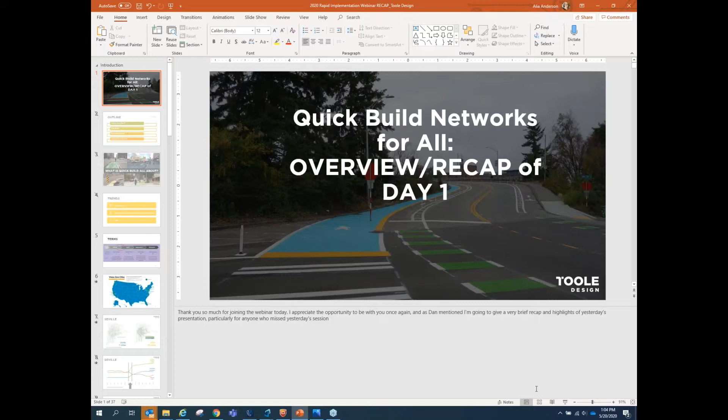And as Dan mentioned, I'm going to give a very brief recap and a few highlights from yesterday's presentation in case you missed them, particularly for anyone who missed the session yesterday. But my comments this morning will be pretty quick. So I just wanted to start with terminology and definitions.

So as we discussed yesterday, quick build and rapid implementation are terms that we use interchangeably to mean basically a project that uses semi-permanent materials to implement a transportation project for roughly a 1 to 5 year timeline, during which you would collect data about safety and use, and then ideally install a permanent design that responds to what you learned.

So it's important to note that this is distinct from a pop-up or demonstration project. Things like tactical urbanism or better block projects, those are considered pop-ups or demonstration projects, and those are typically installed with more temporary materials. This is where we're thinking, chalk paint and straw bales. These are often homemade materials, easily installed and removed. That's not really our focus for today. There are a lot of resources out there about pop-up or demonstration projects. Please follow up with me later, and I'd be happy to point you to some of those.

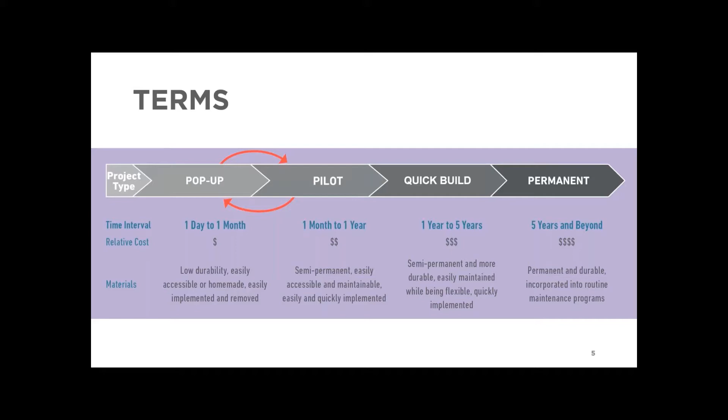And similarly, although our current situation with the pandemic has led to higher than ever demand for safer and wider spaces to walk and bike, the projects we're discussing and the case studies you're going to hear today aren't related to a COVID response in the city, and that's not the focus of today's webinar. Many of the messages that you're going to hear today may be relevant to your COVID open streets planning or similar, but we're not focusing specifically on that. If that is something that you're interested in, please, again, feel free to follow up with me, and I'd love to share some resources specific to that.

And I think this is a big part of the motivation behind quick build, because as cities and counties look to eliminate severe injuries and fatalities from traffic, they're recognizing that doing so in an effective way would take much longer than they have time for, given their Vision Zero commitments, and really starting to view these as life-saving infrastructure design solutions that there just simply isn't time to wait. And so if we can do them effectively and safely, but quickly, why wouldn't we?

I walked through several examples, and I've swapped in some different examples for those of you who were here yesterday. I wanted to share as many pictures as possible. So I just wanted to share some examples of what quick build projects often look like. So here's one on the left from Minneapolis. We're going to hear more about projects like this with one of our case studies today. On the right, a freeway overpass in Seattle, Washington.

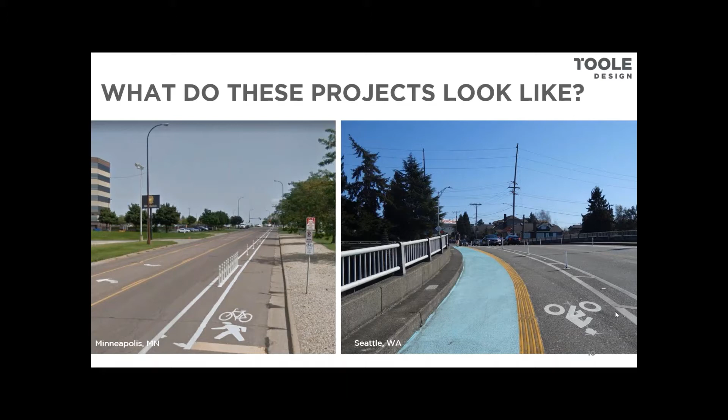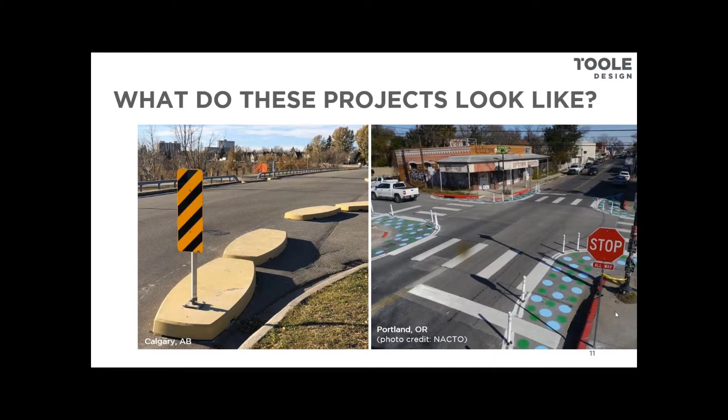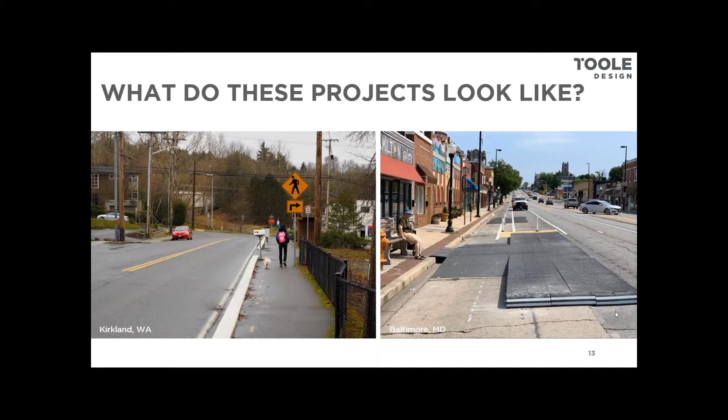Lots of quick build projects are bike lanes, or what's called a pedestrian lane or adaptive sidewalk, as you see in these pictures. Lots of quick build projects are intersection improvements that shorten crossing distance or slow turning vehicle speeds, like the ones that you're seeing here from Calgary or from Portland, Oregon. And quick build projects are often used in both urban locations, like on the right in Baltimore, Maryland, or in more suburban and rural locations, like this adaptive sidewalk in Kirkland, Washington. So we do see them in all sorts of contexts, and the materials change widely. But as you can see in all of these examples, the materials are fairly quick to install and the types of things that you would improve and upgrade over time.

Some of the strengths of quick build that we talked about yesterday, I'm going to recap very quickly. These are drawn from Toole Design Group's work on quick build projects across the country, and also just research that's been done about this subject. So some key takeaways. First of all, they are strategic because they avoid the issue of the perfect being the enemy of the good. And that is mostly focused on design.

Oftentimes we spend a lot of time perfecting our 100% design plans because the installation of the project is going to be permanent and very expensive. Whereas if you are comfortable getting a project to 90% design and installing it there and then adapting and improving it over time, because the installation is not as expensive to install or change, it can be a lot more beneficial and get the project done quickly.

Everybody has experienced, I'm sure, in their own community, the impact that fear of change has on transportation planning and community development projects. Quick build projects help solve that because they give people something to experience and start using, as opposed to looking at photo renderings and talking about it in the abstract for years. So it really can help manage backlash and negative reactions that are mostly tied to simply the fear of change.

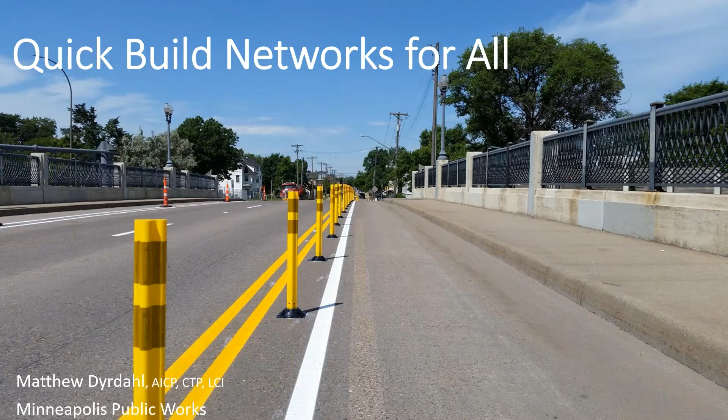Thanks, Dan, and thanks, Alia, for the intro. I'm Matthew Dyrdahl, Bike Ped Coordinator in Minneapolis. I'm really excited to talk with you today about our quick build history in Minneapolis. In preparation for this webinar, it hit me that we have maybe more of a robust program for quick build than I had thought before I started preparing. I'm excited to share that story and how it ties into all the other work we're doing, from protected bikeways to pedestrian crossing improvements to our Vision Zero action plan work. And briefly at the end, how this preparation for quick build has helped us at least partially respond to the COVID-19 pandemic.

The other way to frame the story of quick build in Minneapolis dates back to when I started for the city in 2015. At the time, there was a significant amount of community requests every year, probably thousands, through our 311 and others. Our pedestrian and bicycle advocates and advisors were really advocating for quick build in Minneapolis, and we didn't have a great way to respond quickly to a lot of these requests, because often they don't align with our capital program, so it's very challenging to figure out how to do it. So we started with Quick Build as a way to respond to some of these community requests.

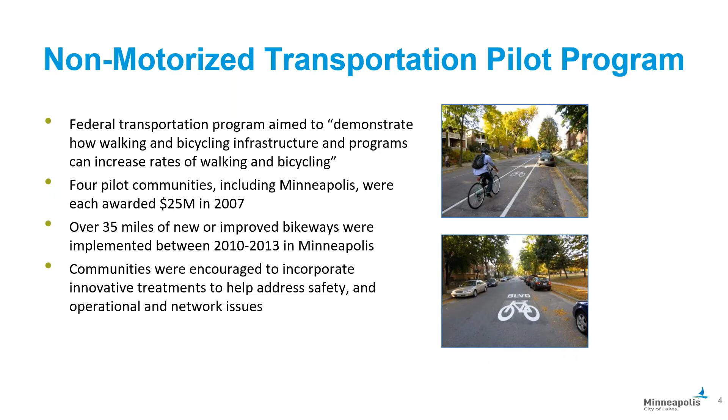...was help us fund and build bikeways in Minneapolis. That's the biggest impact it made. It was a $25 million grant that we received, and we did a robust evaluation of it.

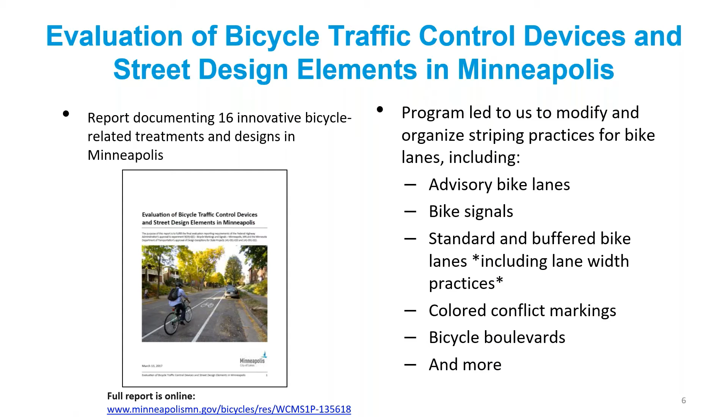Sorry, welcome back. I had just gotten done, or was in the middle of talking about the federal non-motorized transportation pilot program. I'm going to move on to the vision of our protected bikeways in Minneapolis, and frame it around Quick Build as well, because that was our implementation approach.

In 2015, the city passed a protected bikeway plan that called for up to 48 miles of new protected bike lanes by 2020. The goal was 30, but we had 48 miles in the plan, and we definitely hit that 30-mile mark and are moving on to others now.

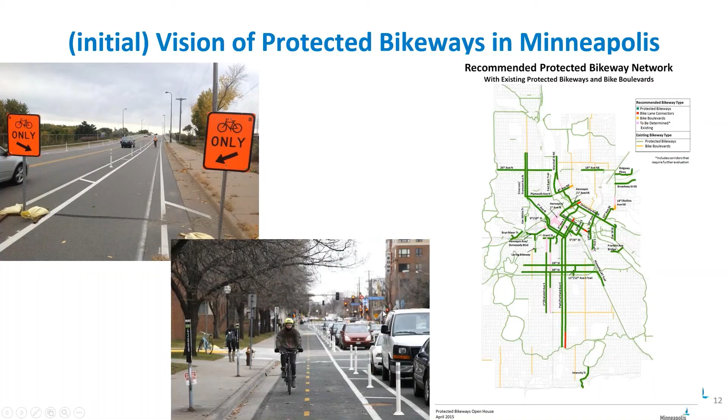The pictures show some early installations: reducing a 4-lane street to 2 lanes for traffic with wide buffers and bollards. In the middle and bottom pictures, we added a 2-way protected bike lane near the University of Minnesota, also with bollards.

Since then, we've transitioned to a different type of concrete barrier, still about 6 inches high and 2 feet wide, but we bought a machine that just pumps it out, kind of like those Play-Doh machines where you push it down from the top and it produces a really smooth concrete barrier. That's a positive part of our Quick Build program in terms of providing a more robust barrier.

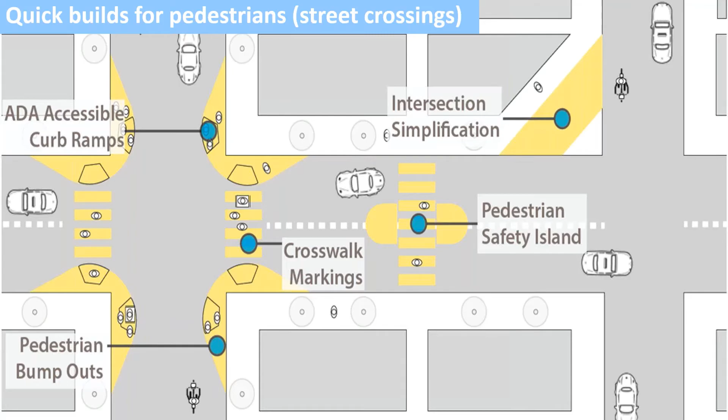We have a variety of neighborhoods in the city that have weird streets that zig and zag, and it just leaves a little extra space for people to cross. So one of the things we've been doing is going back and using quick build to tee them up, kind of get rid of some of that dead space. I'll show some examples of that.

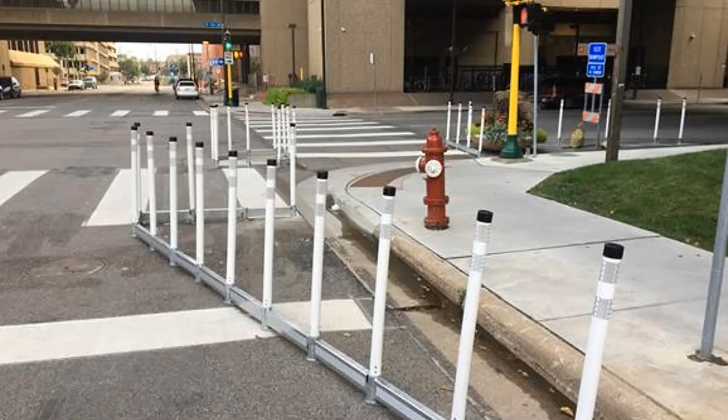This was just an opportunity to show people what it could look like, extending the curb or curb bump outs. We were also at the time considering revisions to our crosswalk marking policy, from transverse parallel lines to a zebra or continental.

We've also experimented with using rail. What you're looking at now is a 2017 installation, essentially using a solid rail that's drilled into the pavement. This is called design line as the quick build. And we did a fairly extensive evaluation of this as well.

The biggest thing I was worried about as a winter city is how well snowplows would handle this. There were really no issues with it. They were able to use the rail kind of like they do a curb, and the plow blade could essentially rub against it without damaging it or the plow.

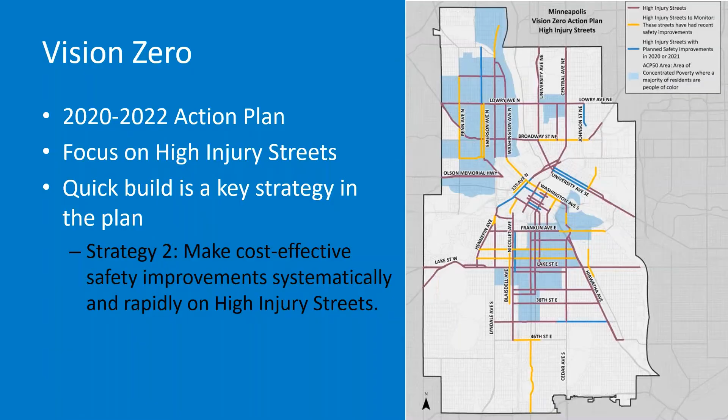And then finally, some of these quick build treatments have been popular, they've been successful. When we passed our Vision Zero action plan this past December, one of the biggest strategies was essentially a quick build. So in the first 3 years of our implementation of Vision Zero, we want to get to as many of our high injury streets as we can.

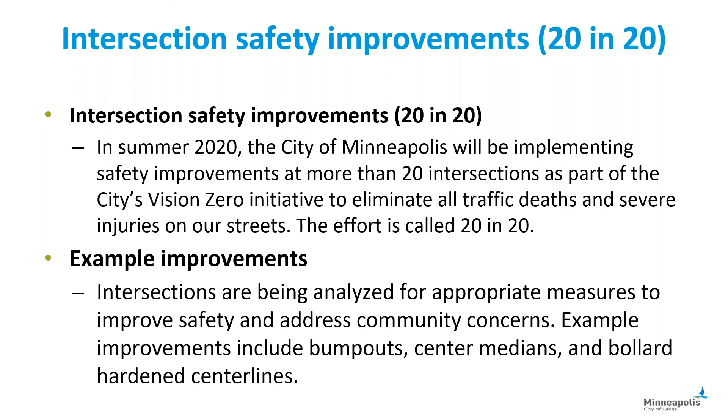In 2020, this year, we have an initiative we're calling 20 in 20, where we're going to install 20 quick build pedestrian and street safety projects. Again targeting bump outs, center medians, and also experimenting for the first time with bollard hardened center lines. That'll be really interesting to see how that works.

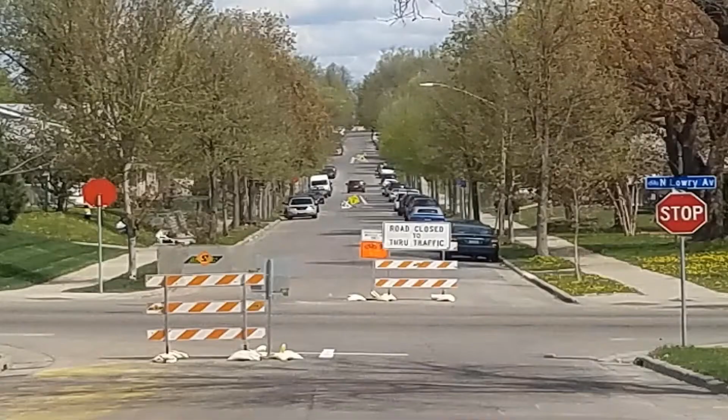And then again, I'll quickly go through here in the interest of time, but we've taken some of the lessons of quick build and applied it fairly rapidly in response, to open up some more space for people walking and biking for social distancing. You can see on the right the context for our city and where these healthy, stay healthy street loops are. And our park board has also done a lot of work around their parkway system around the lakes and the Mississippi River. I'll just show a couple pictures of that.

And then I'll just end with our lessons and suggestions. I know there's probably a wide variety of cities, agencies, and interests on this call. So lessons for communities that haven't worked much with quick build: I would say try it out, call it a pilot, temporary, a test, whatever you want to call it.

I think this helps put people's minds at ease. Permanence can sometimes make people a little more nervous about it. Be prepared for issues and have that be part of it, so assure people that you'll evaluate, monitor, adjust, and actually follow through on that. So if a neighborhood business has issues with a quick build, you may want to work with them to change it. And interestingly, being prepared for success is also a suggestion.

We've dealt with that a decent amount. Early on we planned to take out our installation after a couple months, but the evaluation showed it was really successful, and then there was just a lot of pressure to keep it in and make it permanent. That can be a year or two process, so just be prepared for that or think through how you'd respond.

Find low-hanging fruit. Parking spaces near intersections are a great place to start for pedestrian crossing improvements, because you can just put the bollards in—people shouldn't be parking very close to the intersection anyway. Also, if you have wider streets, you can narrow up some travel lanes and install bike lanes with a little bit of a buffer and put in some bollards. I think that can build up support and show evidence that it works.

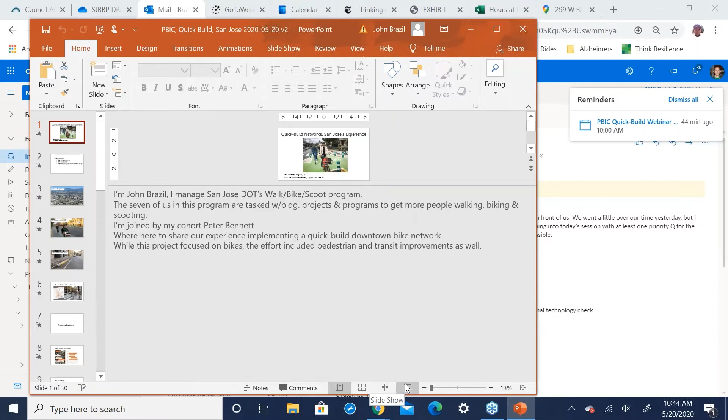Wonderful, well thanks everyone. Matthew, that was really great, fascinating to see your work—I was really inspired by it. Also thanks to Amar and Aaliyah for their great presentations. My name is John Brazil, and as Dan mentioned in the introduction, I manage San Jose's Walk, Bike, Scoot program. There are 7 of us in this program, and we're tasked with building projects and programs to get more people walking, biking, and scooting. I'm joined by my cohort, Peter Bennett. We're here to share our experiences implementing a quick build downtown bike network. While this project focused on bikes, the effort did include pedestrian and transit improvements as well—I think Peter may touch on that in his part of the presentation.

Okay, so here's what we're going to share with you. First, I'll start out with a snapshot of the city to give you context. And then to set the stage, I'll provide a bit of history on our previous efforts, and I'll note a few aha moments. I think they'll seem kind of obvious to you now, but back then they were somewhat of ahas. And then I'll hand it off to Peter, and he'll talk about our Downtown Better Bikeways quick build network.

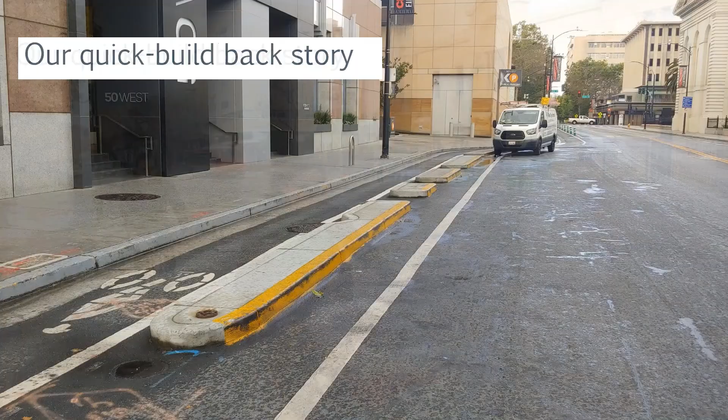So now jump forward to 2014 when city leaders were beginning to warm up to separated bike lanes and bike boulevards. But using traditional planning, design, and construction processes created all sorts of problems that you've heard us talk about in this presentation and yesterday. They took too long, they were too expensive, and they didn't allow nimble iterative modifications. Our first separated bike lane took 2 years, cost about $50,000, and was only about 50 feet long. You see it here in this picture. It was a raised curb protected separated bike lane. And by the way, this picture was taken during shelter in place. That's why it looks pretty dead in the picture, but usually it's pretty active.

So this is where the second aha comes in. We needed to use quick build strategies. And that's exactly what Peter did with our Downtown Better Bikeways project in 2018 and 2019. Before Peter talks about that project, let me mention how we're scaling up this quick build strategy. I and a consultant team at Toole Design have nearly completed a 2-year process to create our new city bike plan. So that plan includes a 600-mile network that will be all ages and abilities, so mainly separated bike lanes and bike boulevards, and it will also be quick build. So this will cut the implementation costs and schedule nearly in half. That's a huge benefit. So now let me introduce Peter to talk about our Better Bikeways quick build project.

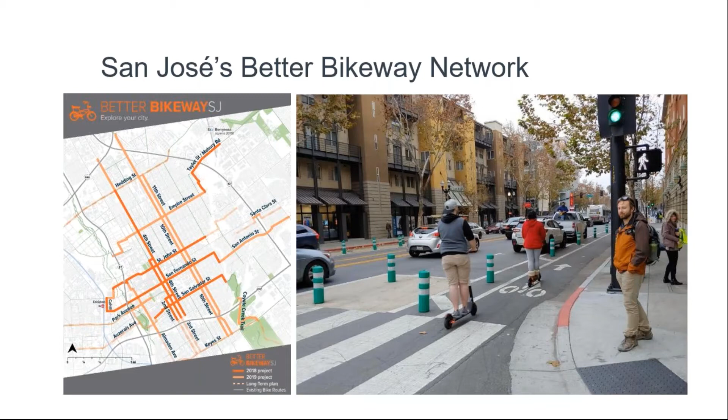The scooters actually arrived in that early 2018 time when we were just doing the planning and outreach for this project. Nothing had shown up on the ground. And many people joined our meetings and said, you know, let's talk about the scooters. Why are they on the sidewalks? And it was very good timing for us to say, well, we actually have some projects planned that could address this. And so the scooter riders helped actually form some support for this project. And as we started to get some ridership data, they also form some of the increase in ridership that we've had.

So first, I'll go through what our outreach engagement process was like. We used many different methods. We didn't just hold 2 public meetings and go to construction and dust off our hands. We knew that this was going to be different and this is going to be big. And the concept that we talked about for what we were trying to avoid was called the political valley. And that is the line graph on the bottom right.

You can see while your project is being planned and starting construction, not many people know about a project. It may have moderate support, and then as soon as you hit construction, you're going to dip into a valley. We saw that yesterday in the example from Calgary. But your challenge here is to make your way out of the valley as the project is finished construction and seeing a lot of use picking up. But we knew that we're not getting out of that valley just from sitting back and waiting. We needed to hold all kinds of different outreach throughout the process.

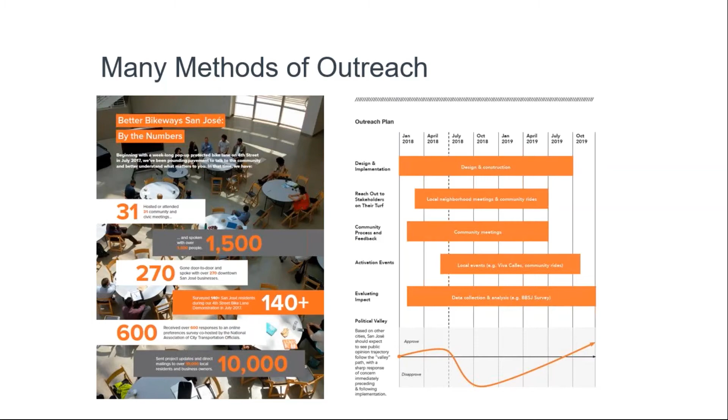So the orange bars above that represent that our meetings are going to continue for a year past when construction starts. And the numbers on the left show that instead of just a few meetings, we actually were going to organizations that were already meeting and doing 15 minutes on their agenda. We were doing more mailings, we were going door to door with businesses, and other things like that. So we saw this as kind of a mixed methods approach.

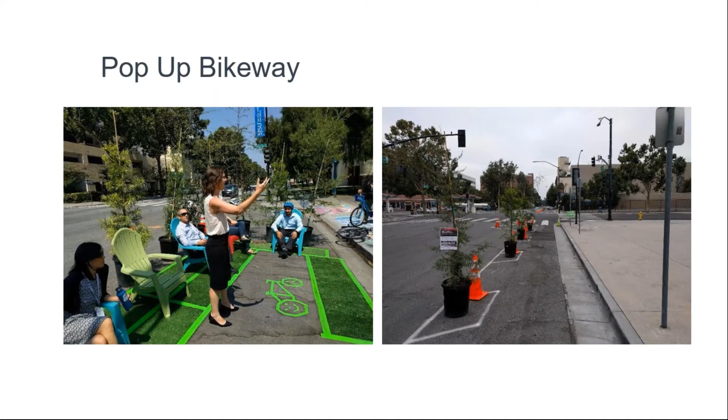Here's a few pictures of those methods. Actually, in that early planning phase, we did pop up the bike lane on one street for 1 week. And so this is not a quick build project, but showing what you're talking about using the pop-up methods helped us get to phase 2 of that spectrum from quick build to permanent.

We also knew we had a lot of stakeholders in the downtown that would make or break this project. And so some of these stakeholders involved some detailed design meetings instead of just the 15 minutes on their agenda. The picture on the right shows that we were in the fire truck with the fire department, seeing how they navigate our streets and how we can design for that.

And this was our political valley. We had the paint go down on one of the first streets on a Friday, and everybody parked in both lanes, the old parking and the new parking. And the news outlets were very quick to take some very enticing pictures of this. So we had articles come out. We had to adapt quickly, and we looked into if the bollards could go in soon afterwards, or what we could do. And it actually only lasted about a week in this condition of parking in both locations.

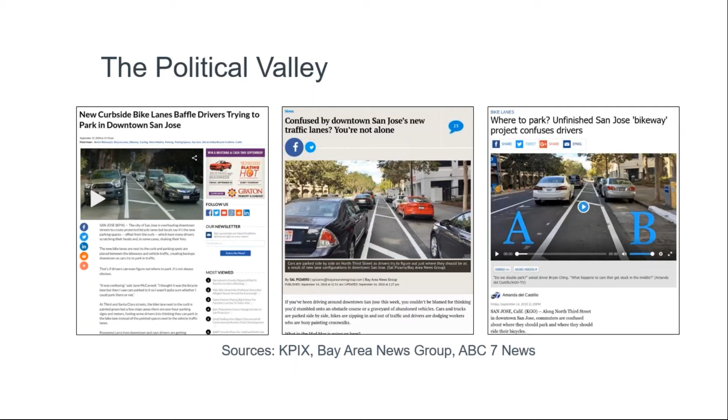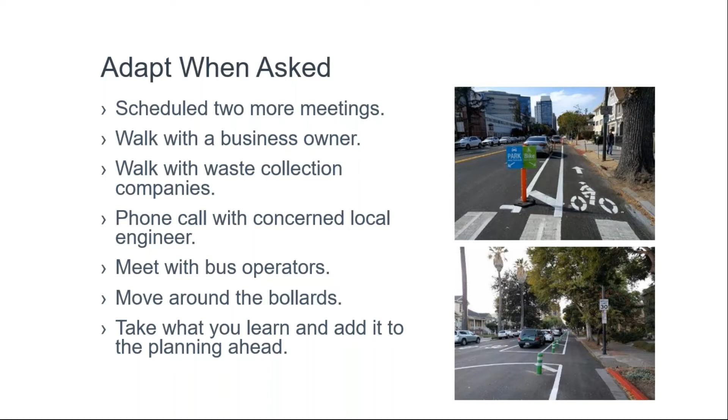But that doesn't mean the political valley lasted a week. We had other things we kept doing. And so here's some examples of things. When we had a concerned local engineer, we would go out and meet with him or have a phone call with him. The bus operators and the trash collection companies, we would adapt when asked for someone who's providing input. We want to talk to them, and whether they're happy or upset, we found that listening always resulted in maybe a design change that everyone could be satisfied with.

So now I'll get into the design and construction of this bikeway network. I find that these lessons might be a little bit in the weeds, detailed, but a lot of folks who are in this webinar might not see all the specific details, but will be able to take some of these to their projects.

The background is, as I mentioned, this is part of a pavement maintenance project. So something San Jose has been doing for years is when a street is repaved, we always see that as an opportunity to change the layout from one curb to the other curb. So there's going to be a new coat of asphalt on top of the street. What can we do just with paint alone that changes the lane arrangement, adds bike lanes, adds crosswalks, but nothing that is a physical construction? And so that's something that we've been doing for several years.

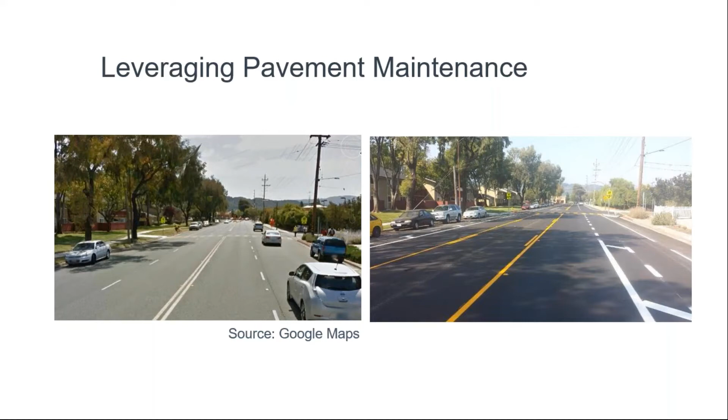And when the concept of an all ages and abilities bikeway network came up, we said, well, the one tool that we need to add into our toolbox is that we'll need some kind of vertical element. So quick build for us was essentially doing the pavement maintenance project with the paint on the ground, but also putting in a few plastic posts.

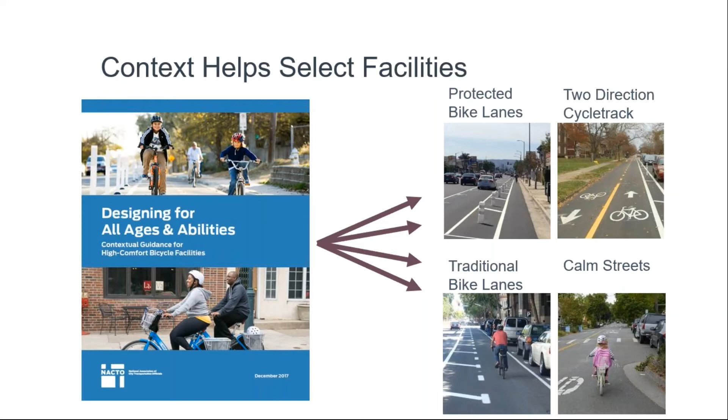We used the NACTO All Ages and Abilities Design Guide to determine what type of bike facility made the most sense on that grid-like map that I showed you earlier. And it wasn't always a separated protected bike lane. That was the case for places where we had higher traffic volumes or speeds, but in that NACTO guidance, you also sometimes are guided towards installing a basic bike lane or a bike boulevard type treatment.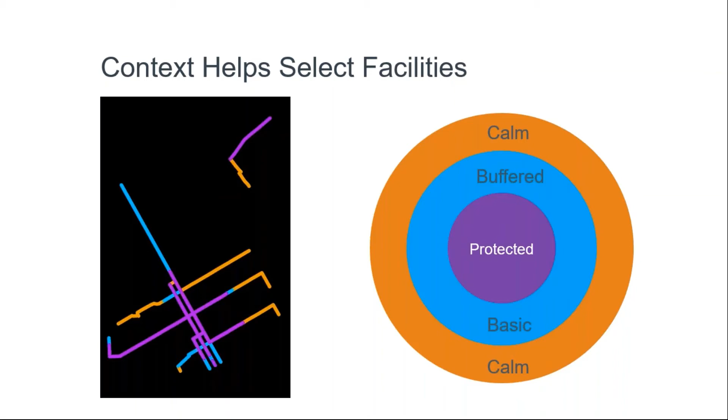And sure enough, after looking at the conditions on the roadways, this is what we ended up with. The purple lines in the downtown core did need to be protected bike lanes. But as you make your way out of that downtown core, that's where those blue lines are shown. Those are in more residential neighborhood areas. Maybe just a regular buffered or basic bike lane will do. And then further out where you're on slower, low volume streets with houses, we just used a calm street treatment, better known as a bike boulevard.

The first thing that we started developing with our design consultant were details. These little pictures on the screen, there's about 6 of them, show elements in a toolkit that we could combine in different combinations to create a cohesive network. Whether you're at one intersection or another intersection, you're always seeing the same markings. And these represent bits of corners and block lengths that you would be installing in combinations with each other.

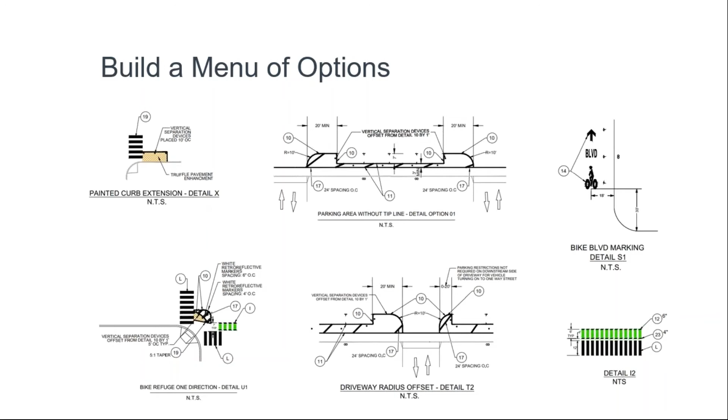So when you use all these details, you agree on those first with your planning staff, and then it's just a matter of applying them across the streets. And this is what it would look like, all applied in different combinations at different parts of each intersection.

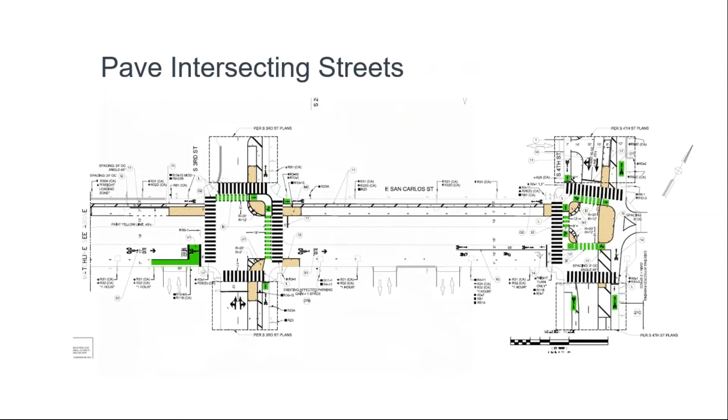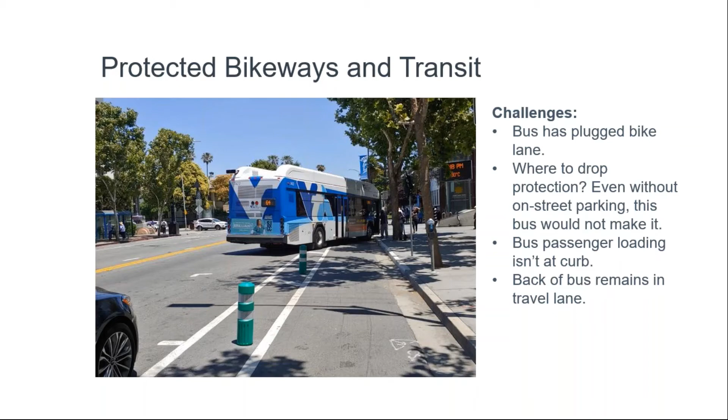So a few other things we were looking at: we had in our network one street that had bus service on it. Because construction happened really rapidly, we needed to put in some version of the protected bike lanes before we had bus platforms installed where the bus would pull up next to them. With a parking-protected bike lane and a bus pulling into the bike lane, it didn't work very well. The bus hangs out into the travel lane, doesn't get fully to the curb so passengers can board, and the bike lane is completely stopped up. So while it was necessary to have a time period where buses were pulling in and out of these gaps in the bollards, this wasn't a functional design long term.

We also saw a change to our bus network—the bus lines that were on the street were changed due to a network redesign. So it's somewhat fortunate that we didn't put in all the platforms permanently, just to have to take them out again.

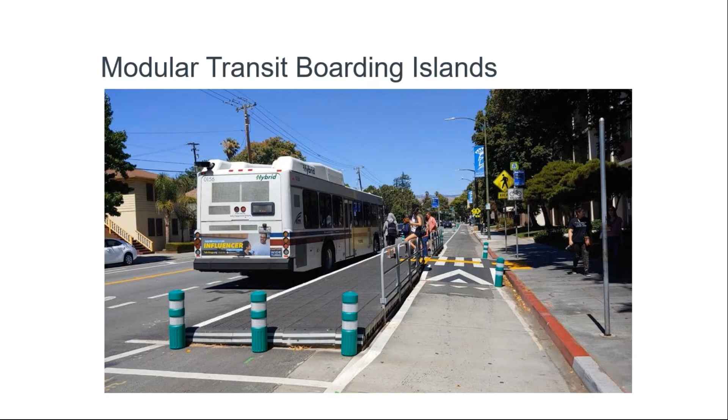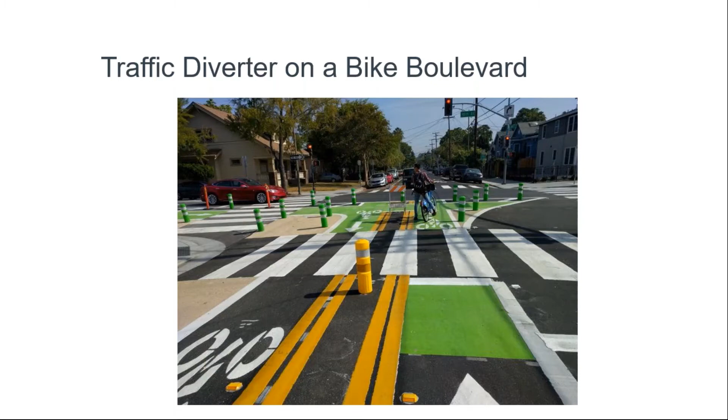Here's another example of something we used on our bike boulevard streets. A common feature of a bike boulevard is a traffic diverter, a place where cars turn left or right but bikes can go straight through. These are usually made of concrete, and in a permanent version of this network this certainly would be made of concrete. But this image shows how with paint and plastic alone—it's very busy with paint and plastic—we created a spot where bikes go straight through and cars are turning.

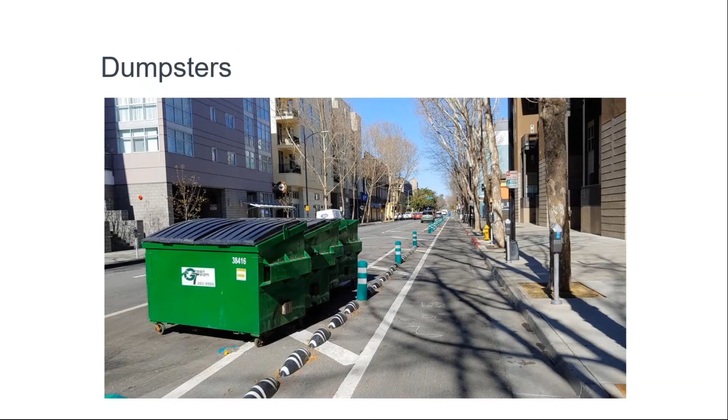We also had to work with our trash collection companies to determine how dumpsters can be safely picked up and moved in and out from the buildings near them. One issue was dumpsters rolling down the street all the way to the curb. A quick build solution for this was putting in zebra bumps between the bollards, so now the dumpsters have something to roll against.

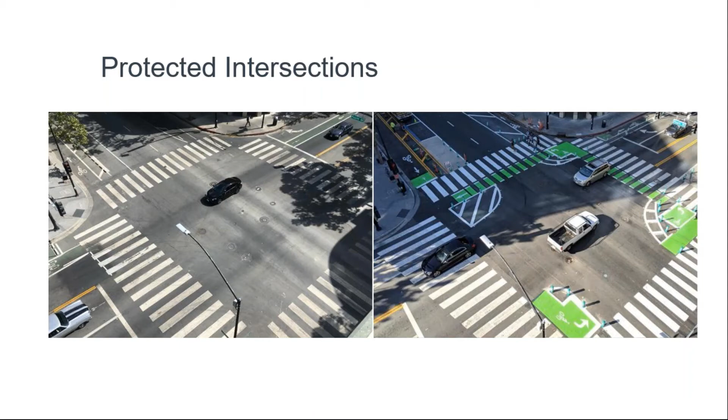Lastly, I wanted to share some design lessons about protected intersections—something we were kind of pioneering as we did the design of this project. The protected intersection design with paint and plastic only involved putting in these corner islands you can see in the image on the right. It's very visually striking the difference between the left and right images. It's the same intersection, and how much space there was for pedestrian crossing from corner to corner was quite a long distance in the past. Now these protected corners have narrowed that pedestrian crossing down to just crossing the two travel lanes.

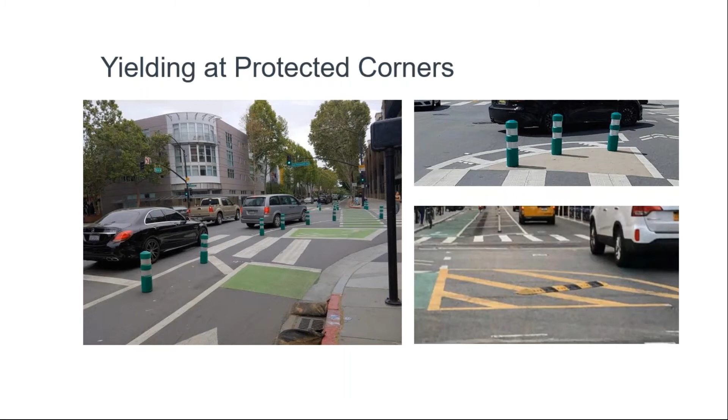Here are some images of those protected corners on the ground. Because the protected intersection design is such a new concept that a lot of cities are still working through, we wanted to make sure the van turning in the photo is turning and yielding when reaching the bike crossing. The images on the right show we've used small reflective bumps in those corners to create a yield situation. We looked to New York City and other cities that have used actual speed humps in those same corners—that's something we'd be adding to this network in the future.

So a few lessons learned about the construction and planning of this project. This was a department-wide commitment—over 100 Department of Transportation employees touched this project in a big or small way, from our maintenance crews all the way up to our planning and engineering staff.

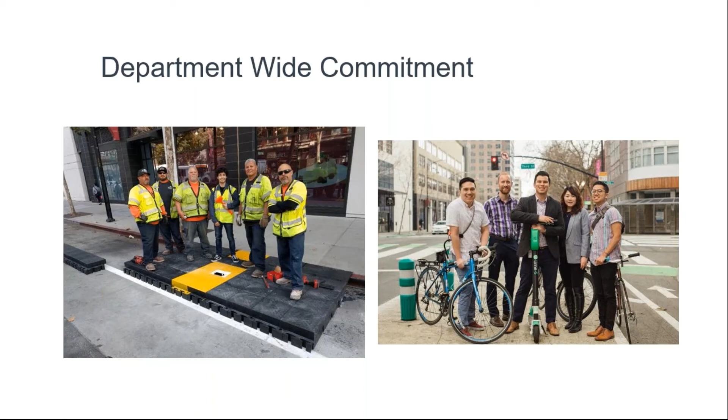In that 2018 period when the design was happening, we had a cross-departmental planning staff meeting weekly, every Wednesday, for two hours to talk through issues and actually design on the fly. Having someone from your parking group there, even though they may not normally be involved in a planning exercise, was important—it helped us work through issues on a day-to-day basis rather than getting a response a month later.

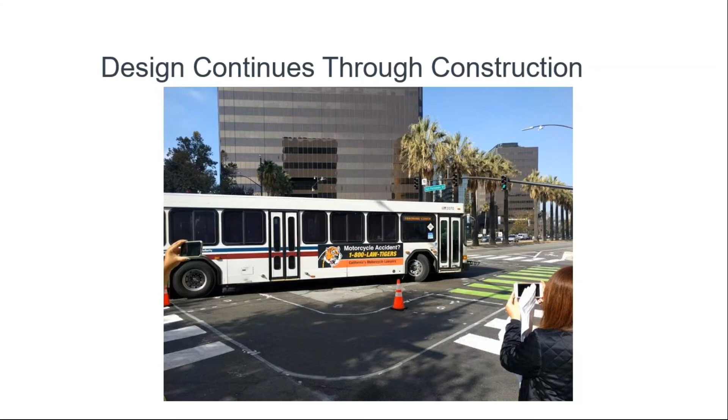We also continued that design all the way through into construction. Field verifying the design was a big thing our engineers were working on. You can see a picture here of a place where we were building a protected intersection, and we needed to know how the bus turned the corner. Everyone had their phones out, we all watched the bus turn the corner, and we moved that orange cone around based on where we saw the bus turning.

I wanted to talk a bit about measuring success. We've collected some data, and we also have some before data stashed away for when we can compare apples to apples, before and after data.

One quick result we saw is that in many different locations downtown, we saw a 33% increase in bike and scooter ridership. But on the Better Bikeway streets, we saw a 50% increase. So they overperformed the other streets that hadn't gotten some kind of improvement.

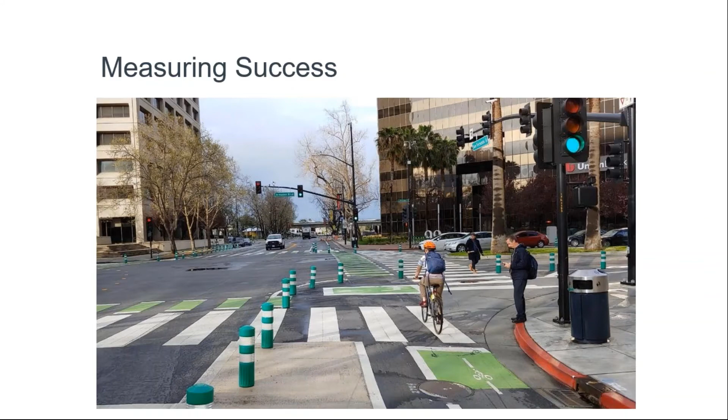I want to finish up talking about how this project compares to a capital project in terms of cost. As I mentioned, we were building this first phase of the Better Bikeways in 2018 and 2019. That two-year process, the total cost is about 1.3 million, and that's in San Jose, California dollars, so this could always be translated.

As a comparison, we have a project coming up for upgrading one mile of our network into a permanent capital project, and that one mile will be planned over the next five years. The estimated cost for that project is $11 million.

This is not to say that one type of project is better or worse than the other. These are two necessary kinds of projects, but they have different costs and different timescales. Importantly, that capital project is a direct descendant of the Better Bikeways quick build project.

So the quick build was installed, and our state granting agency who awarded us that grant thought it was very compelling that we had successfully demonstrated it, and they awarded us that grant. So quick build projects can essentially write your grant application for you when it comes to getting funding for the permanent construction.